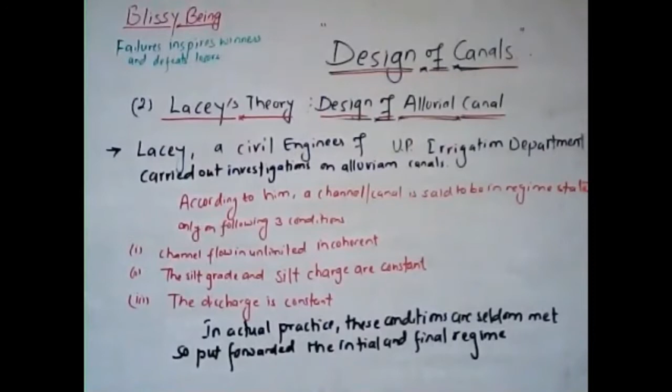This theory was put forward by Lacey, a civil engineer of UP Irrigation Department, who carried out extensive investigations on canals in alluvium. He found that there were certain drawbacks in Kennedy's theory, and he put forward his new theory.

He said that according to Kennedy, a channel is said to be in a state of regime if there is neither silting nor scouring in the channel. But Lacey came out with a statement that even though a channel showing no silting or scouring may actually not be a regime channel.

He found various drawbacks in Kennedy's theory: Kennedy did not suggest any equations for determining the bed slope, did not take into account silt concentration and bed load, did not define silt grade and silt charge, and did not give his own flow equations. He used Kutter's flow equations without any modifications. These were the various drawbacks of Kennedy's theory.

So Lacey put his own theory, and according to Lacey's theory, a channel is said to be in a regime channel or regime state only if the following three conditions are met. First is the channel flows in unlimited incoherent soil.

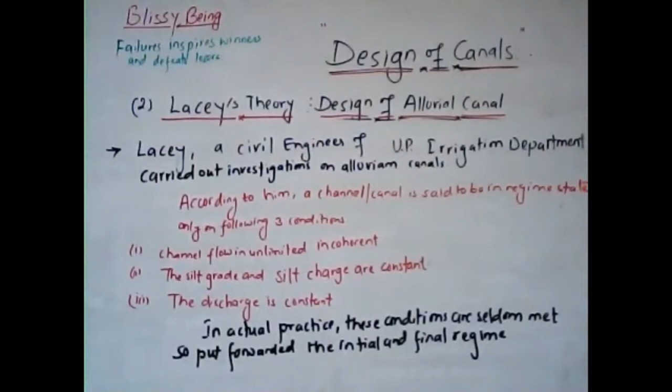But in actual practice, these three conditions are very, very difficult to achieve. So Lacey put forward his theory on the basis of initial and final regime of the channel.

Friends, before going through the initial regime and the final regime, we first need to understand what the regime channel is. The regime channel is defined as the stable channel section whose width, depth, and bed slope have undergone modifications by silting and scouring and are so adjusted that they have attained the equilibrium.

So this is the regime channel, in which the depth, the width, and the bed slope have undergone modifications by the process of silting and scouring, and they are adjusted in a manner so that they have attained the equilibrium. This is the regime channel.

Friends, Lacey said that the channel has two regimes: the initial regime and the final regime. The initial regime is when the channel attains the final section but doesn't secure its longitudinal slope, and it is the first stage of the regime.

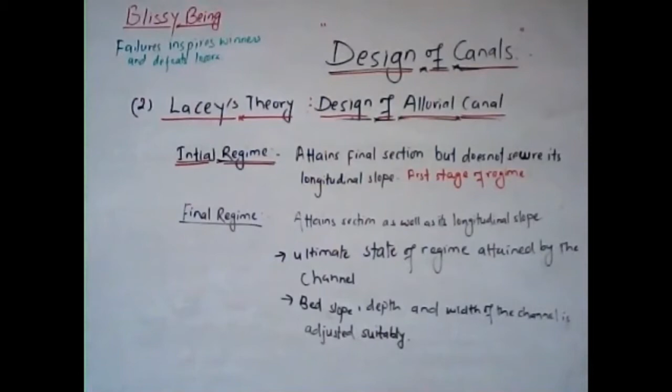Likewise, the final regime is the regime when the channel attains the section as well as the longitudinal slope. So the section is recovered as well as the longitudinal slope. It is the ultimate stage of the regime attained by the channel, in which the bed slope, depth, and width of the channel are suitably adjusted. So this is the initial and final regime that Lacey demonstrated.

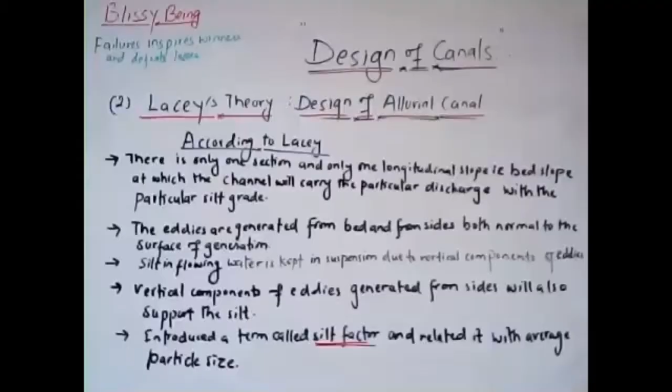So the certain assumptions made by Lacey are: first, there is only one section and only one longitudinal slope, that is the bed slope, at which the channel will carry the particular discharge with the particular silt grade. So he suggested there is only one section that has a particular value of the longitudinal or bed slope with a particular bed width and depth of the channel.

So different sections cannot have the same amount of silt grade as compared to the previous section. Two sections cannot have identical properties, he suggested. Likewise, the eddies are generated from the bed and from the sides, both normal to the surface of the generations.

Similarly, assume that silt in flowing water is kept in suspension due to the vertical components of eddies. The vertical components of eddies generated from the sides also help support the silt particles. Likewise, he introduced a term called silt factor and related this silt factor with the average particle size. These were the assumptions made by Lacey for the design of alluvial channels.

He suggested that the eddies are generated from the bed and from the sides, normal to the surface of the generations, and silt in the flowing water is kept in suspension due to the vertical component of eddies, and the vertical component of eddies from the side also supports the silt. These were the assumptions made by Lacey for the design of the alluvial canal.

So the equations for Lacey's theory. Lacey forwarded his equations by extensive study. He first forwarded the formula for silt factor F, given as silt factor F equals 1.76 times under root of d mm, where d is the diameter of the silt particles given in mm.

Second is the velocity, v equals to under root of 2/5 times f into r, where F is the silt factor and r is the hydraulic mean radius. Likewise, he also suggested a third equation as Af square equals to 140 v to the power 5.

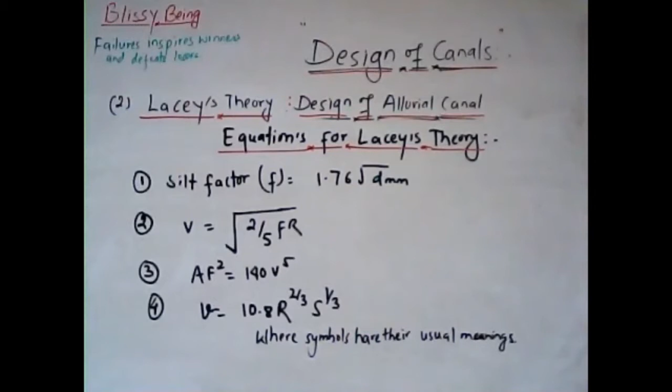And he also related the mean velocity with the hydraulic radius and the bed slope as v equals to 10.8 into r to the power 2/3 s to the power 1/3. The symbols in these expressions have their usual meanings.

Now friends, we'll go through the various derived expressions and equations of Lacey's theory. From the above four relations, we can derive various relationships among other parameters. The first derived equation is the relationship between velocity and discharge.

To determine the relationship between velocity and discharge, we already know that Af square equals to 140 v to the power 5. If you solve it, you obtain v equals to Af square by 140 to the power 1 by 5. Substituting the area of cross section as discharge by velocity using the continuity equation, you can easily obtain velocity v equals to Qf square by 140 to the power 1 by 6. This is the derived expression between velocity and discharge.

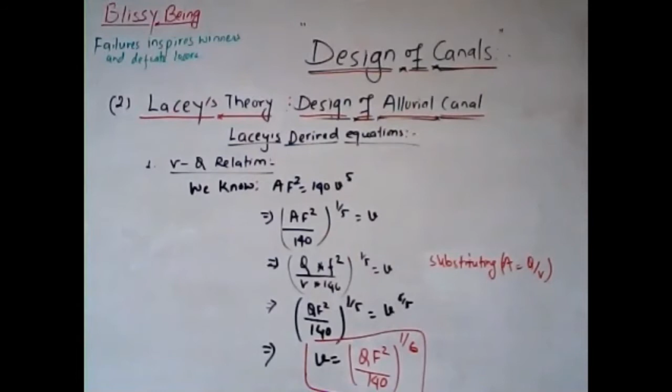Now the second derived expression is between the wetted perimeter P and the discharge. For this, we know that V equals to root 2 by 5 times the silt factor into the hydraulic radius. If you substitute the hydraulic radius by area by wetted perimeter, you can put R equals to A by P here.

You have to convert everything, all the expressions, into terms of the parameter and the discharge. So you have to substitute the value of area in terms of discharge. You can substitute area A as Q by V.

You can again substitute the value of silt factor F using the expression Af square equals to 140 v to the power 5. If you solve that, f equals to 140 v to the power 5 by A to the power 1 by 2 will be the substitution value. If you substitute and solve this, you easily obtain P equals to 4.75 root Q. This is the expression for the wetted perimeter and the discharge.

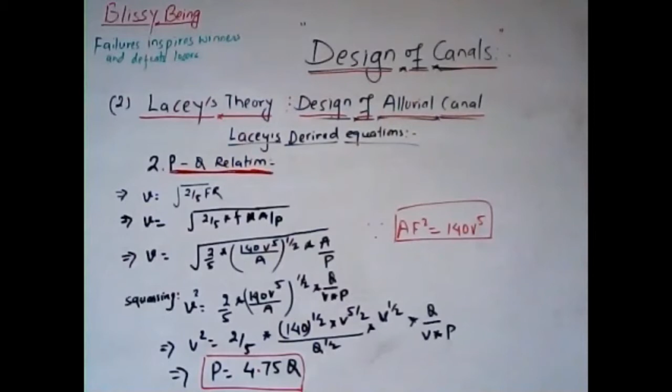The third derived expression is the bed slope equals to 1 by 4980 cube root of F cube by R. So the fourth is S equals to 1 by 3340 times F 5 by 3 divided by Q 1 by 6.

Likewise, the hydraulic radius R can be expressed in terms of discharge and silt factor as R equals to 0.47 times Q by F to the power 1 by 3.

Likewise, if you convert this hydraulic radius and discharge in terms of specific discharge, that is Q by B, you can obtain the hydraulic radius R equals to 1.35 times q square by F to the power 1 by 3, where small q is the specific discharge, that is the discharge per unit width of the channel.

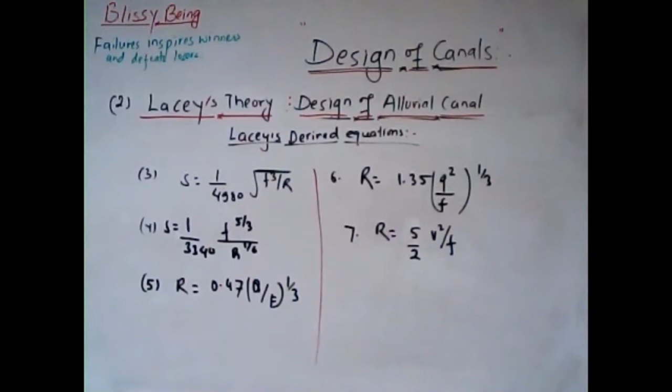And at last, you can also relate the hydraulic mean radius in terms of mean velocity and the silt factor as R equals to 5 by 2 into V square by F. So these are Lacey's derived expressions and equations.

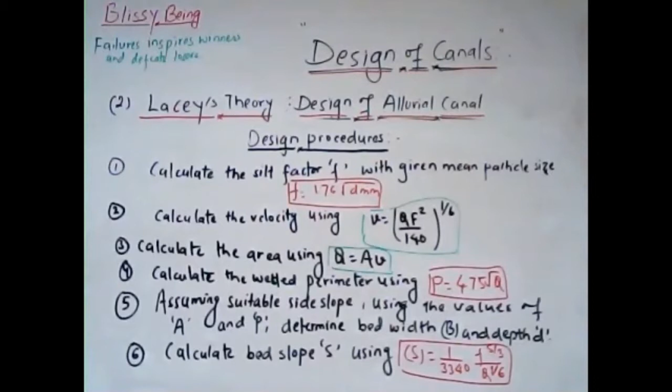Now friends, we will move through the design procedure of the alluvial canal by Lacey's theory. At first, we need to calculate the silt factor from the given particle size, using the formula F equals to 1.76 under root D, where D is the diameter of the particle given in mm. So you can calculate the silt factor.

After that, the next step is to calculate the velocity, using the expression V equals to QF squared by 140 to the power 1 by 6. Generally, the discharge will be given in the question, and since you have already obtained the silt factor, you can determine the velocity easily.

Likewise, the next, third step is to determine the area using the continuity equation. You can use Q equals to AV, and since you have already found the velocity and the discharge is already given, you can easily find the area of cross section of that channel.

In the fourth step, you need to calculate the wetted perimeter using the length of the linear waterway. Using the perimeter P equals to 4.75 root Q, you can easily find out the perimeter. Since discharge is given in the question, you can easily find the perimeter here. After determining the perimeter...

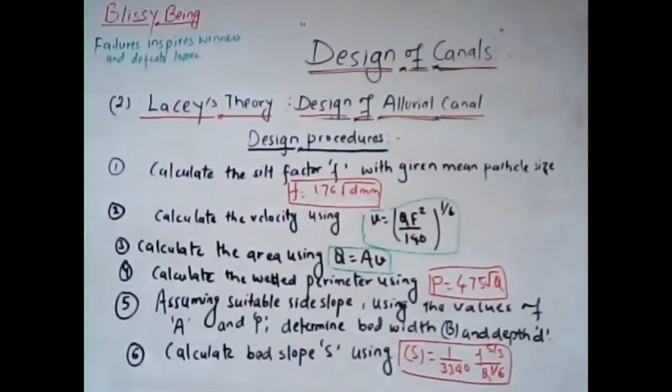Finally, you need to determine the bed slope using the formula: bed slope S equals to 1 by 3340 into F, that is silt factor, to the power 5 by 3, Q to the power 1 by 6. Using this expression, you can easily find the bed slope. Since you already know the silt factor F and the discharge, you can easily find out the bed slope using this expression.

Now friends, we need to design a regime channel for a discharge of 40 cumecs and a silt factor of 1.2 using the Lacey theory. So we have the problem: design a canal having discharge 40 cumecs per second, having silt factor 1.2, using the Lacey theory. Let's proceed.

The given data is the discharge and the silt factor. Step 1 is to find the silt factor. As the silt factor is already given, that is 1.2, we need to proceed to step 2.

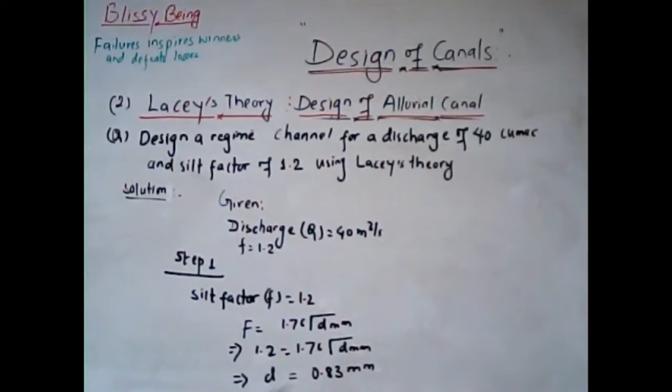In step 2, we need to use the formula for velocity: V equals to QF square by 140, to the power 1 by 6. If you substitute the value of the silt factor as 1.2 and the discharge as 40 cumecs, you can easily obtain the velocity V as 0.862 meter per second.

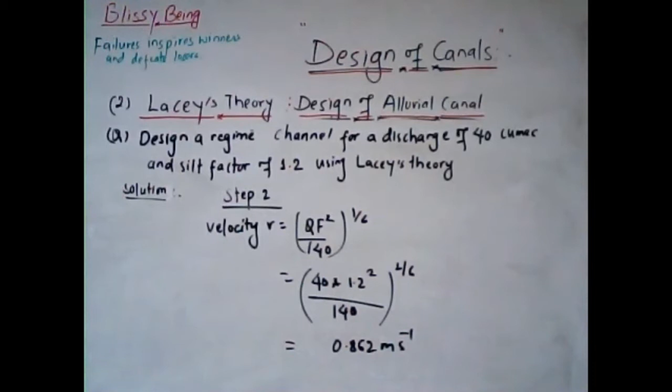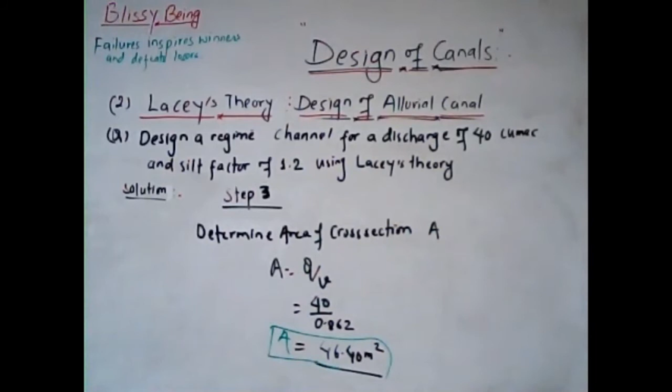In step 3, we need to determine the area of the cross section using the continuity equation: A equals to Q by V. Substitute the value of discharge and the velocity obtained in the previous step, and you can easily obtain the value of the cross sectional area as 46.40.

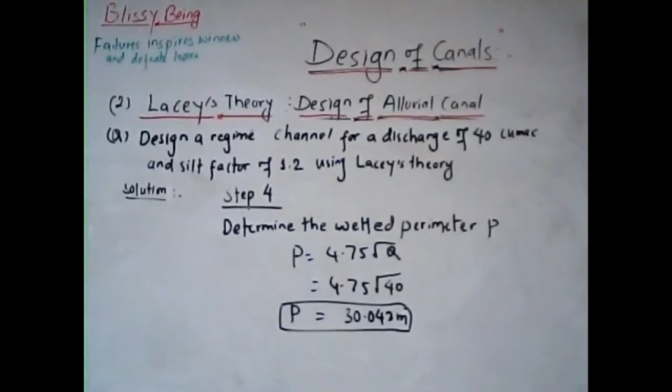In step 4, we need to find the wetted perimeter P. This can be easily found using the formula P equals to 4.75 root Q. Substituting the value of Q, we can obtain perimeter P equals to 30.042 meters.

In step 5, we need to determine the bed width and the depth of the channel. For this, we assume a trapezoidal canal having side slope 0.5 horizontal to 1 vertical. We apply the formula for the wetted perimeter and wetted area: perimeter P equals to B plus 2D root over 1 plus Z square, for the trapezoidal section.

Substituting the value of the perimeter, we can find the expression in terms of B, that is B equals to 30.042 minus 2.236 times D. Let this be expression 1. Likewise, we can write the area as A equals BD plus ZD square.

You know the area as determined from the previous step. Substitute the value of area and substitute the bed width from expression 1. This gives you a quadratic equation. Solving this quadratic equation, you can find the depth of the canal: the first value is 15.590 meters and the second is 1.714 meters.

The depth of 15.590 meters is impractical for use, as it is a very huge depth. So we assume that the depth of the channel is 1.714 meters. This is the correct depth, and substituting this depth, we obtain the value of the bed width as 26.20 meters.

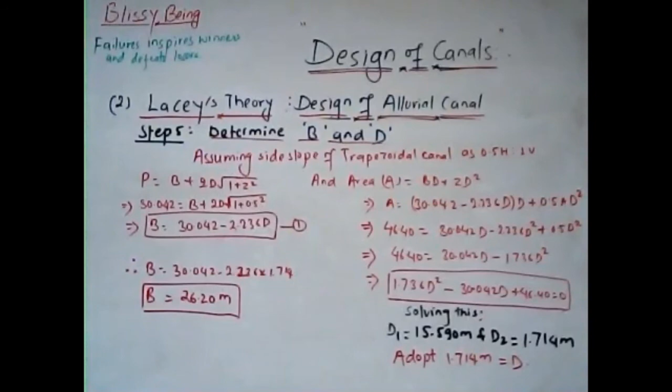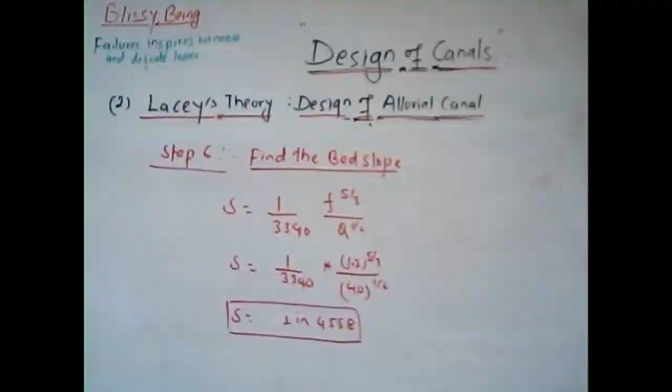In step 6, you need to find the bed slope, using the expression S equals to 1 by 3340 into F to the power 5 by 3, Q to the power 1 by 6. Substituting the values of silt factor as 1.2 and discharge as 40, you can easily find the bed slope as 1 in 4558.

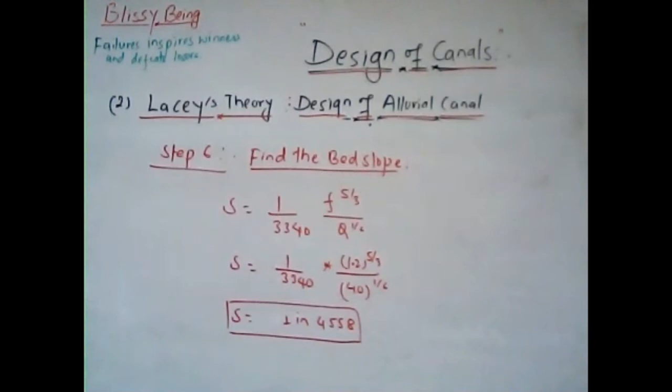So this is the required expression for the bed slope, 1 in 4558. Finally, the design is a trapezoidal channel section of side slope 0.5 to 1, having bed width 26.20 meters, depth 1.714 meters, and bed slope 1 in 4558.